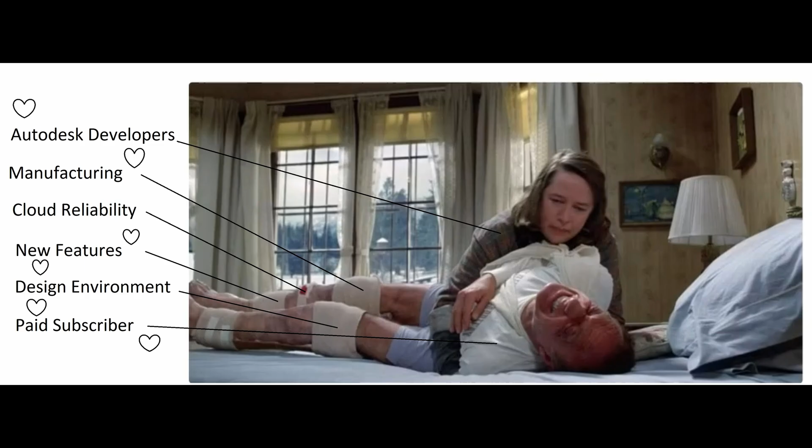Okay, so here we are. It is Saturday at 1:07pm. I was here a little earlier. My internet is connected and I am getting a working offline thing. Earlier I had a working offline.

There's a system problem with Fusion, and so the question is, can I update the files I was working on at the shop? Obviously that is not going to happen.

So I had this graphic here, and it will automatically go into... I tried to flip it back, thinking maybe my internet connection, I had just turned everything on, so I have paused the updates. At least that's one thing Fusion has fixed, because normally when they dumped an update, the system would start getting weird and unstable, the CPU would be working overtime, everything would get hot, and it would get unhappy until it crashed.

So now, fortunately, it can manage offline, which seems to be okay. It's an unexpected outage, that's what happened. So that was great. But what I want to get into is this situation here.

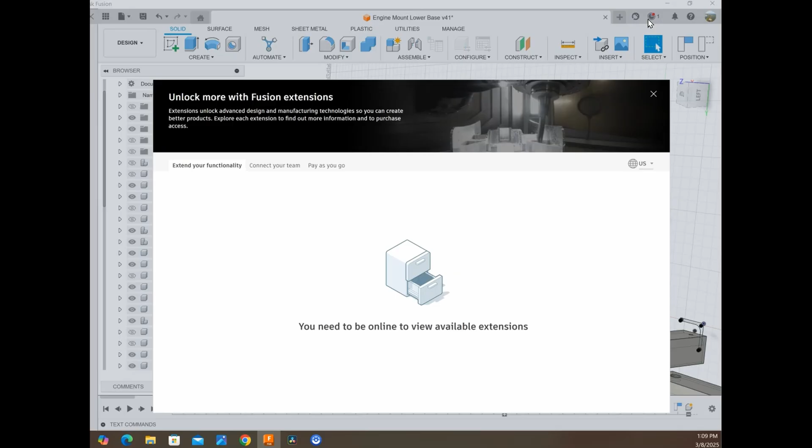When you go and click on the what's new - I think it was a what's new - when you get an update, it'll give you the what's new file. And where was it? It wasn't here. Oh yeah, check out what's new.

So you click this link here, and I don't want to click anywhere near update now, even though - because I don't want it to update - but it'll open a page that I couldn't find on the normal, what do you call it there?

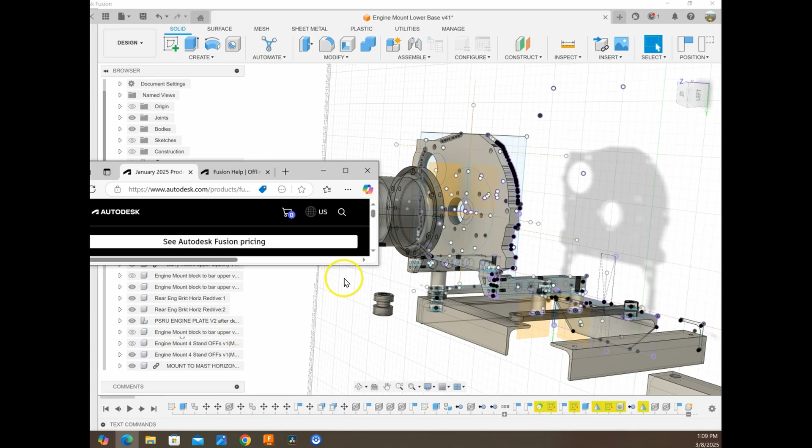So here we go, and everybody's saying that everything is just amazing with Fusion. And because I asked a question, I'm not trying to pull any punches. I love Fusion, the design environment's great, modeling environment's been great. I think it seems to be pretty stable and a mature product.

Everything works the way it should. My gripe is with the CAM environment. But that being said, all the cheerleaders who are running businesses on this, can you please explain to me how you're dealing with all these outages?

And we go to March 5th, right? This is the tale of the tape. This only goes back so far. But you've got stability when saving files - I'm guessing files are being lost. That's always joyful when you're working on something all day and it gets stuck in the queue, or God knows what happens. I've had that happen many, many times.

And then you got a rigid groups problem. If you're not working with joints, I guess you wouldn't notice that, but eventually you do, and that's a problem.

Here, February 23rd, crash scenarios. Update that was preventing keyboard input after the January update. I mean, just at what point?

Okay, great, February 18th, fixed a variety of crashes in the design environment. Well, wonderful. I'm guessing the guys who are running businesses don't have a problem with crashes in the design environment. Their workflows are cool, they're magic, they're absolutely magic. I don't know what operating system they're running - Mac, maybe? Maybe this is not affecting Mac machines.

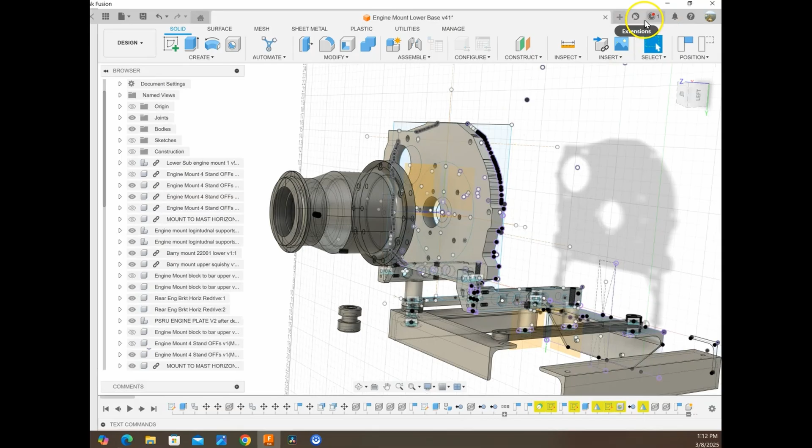January 30th, manufacturing, usability, various crash issues. So this goes only back to January 27th, and we are down here at March 8th. So, and I'm going to work today, trying to get caught up on a Saturday to do some stuff here with my designs, and Fusion is in fuck you mode.

So guys, tell me how you do it. And if I got to learn SolidWorks or I got to learn another software package and pay some money, then so be it. But as a business model, I'm not talking hobby, I'm not messing around to build a birdhouse for your kid or something, where you actually want to do stuff.

So now I'm nervous because anything I do here is not going to be synced to the cloud. And then when I go to my CNC machines, my Lenovo Business ThinkPad at work will not have those files. And so that says, well, then I better put all this on a USB drive. It's just ridiculous. But let's see if this thing will go online.

Oh, now it says working online. Excellent. Only the morning and however long it was offline. And of course, I know there's probably a page with Fusion Health and whatnot.

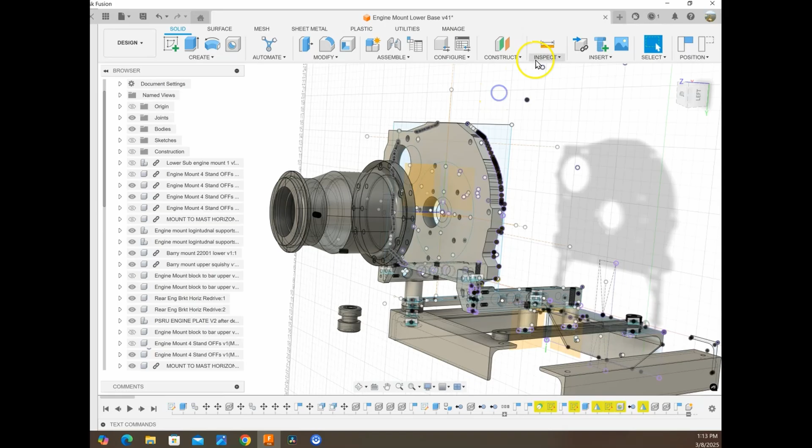My bigger problem was with the libraries, and the libraries were not working the way they should have. So if I went to the manufacturing, let's see if this works, because I was working on cam data at the shop.

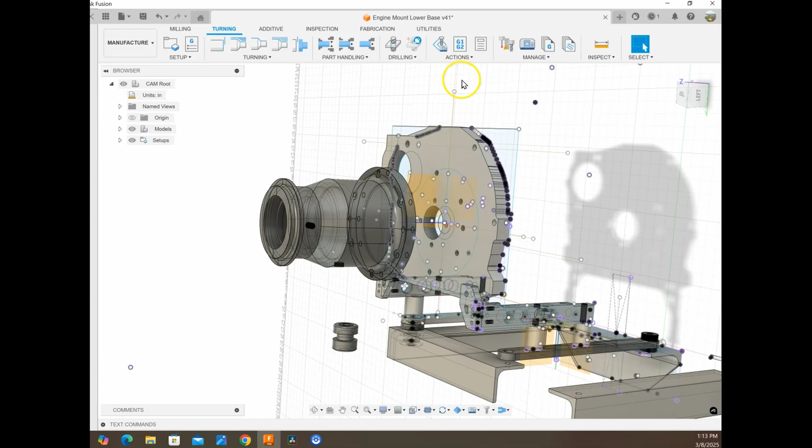And it looks like maybe it's updating. But here we go to the tool library. And let's see, this is gonna...

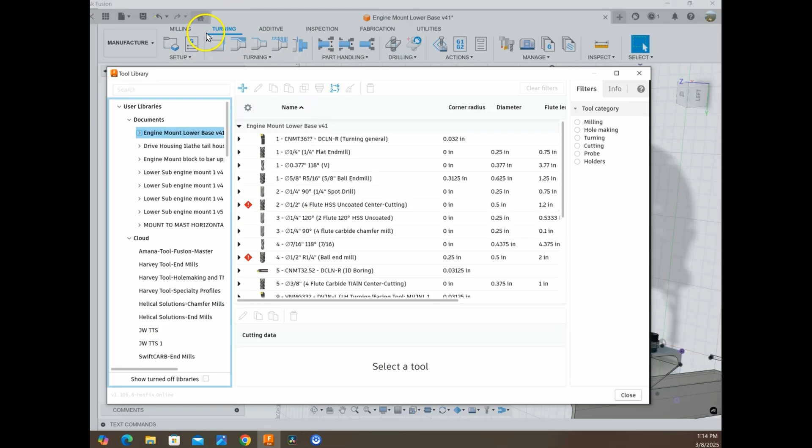Okay, so what we have now here is flags. I don't know if this is a new thing, but I think a lot of the problems with the posting of operations, whether in the turning or the milling or whatever, if it doesn't like the tool, the post will crash. So let's see what we got here.

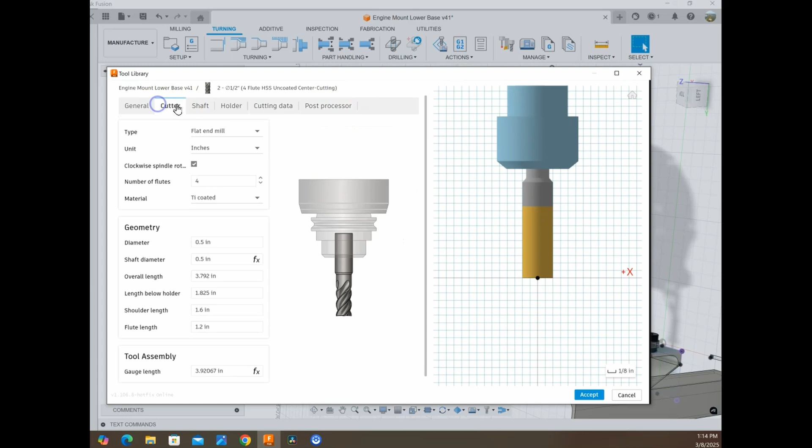It doesn't like something. It was saying before how it didn't like either the cutter or the holder or something, and it would actually give you a warning. It will tell you like the shoulder length can't be more than the overall length or something like that. And so I was like, oh, cool.

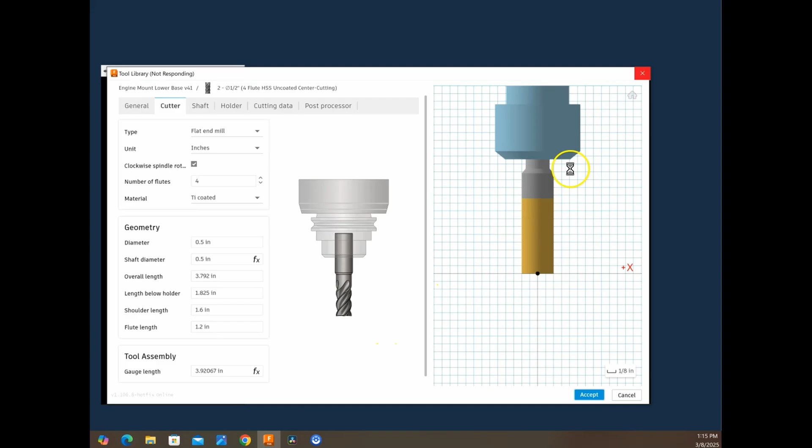You know, when you're working late and you fat finger something, or you put a decimal point in the wrong spot, it's good. And that, according to my programmer friends, tell me that. And here we go, what do we got? See, it doesn't want to crash it, and now we're crashing.

Isn't this joyful? See, this is the kind of shit that's been going on. And you ask, how am I supposed to? Now I'm going to guess it doesn't like the shoulder here. I'm going to guess, I don't know. And now it's not responding, and this is crashing.

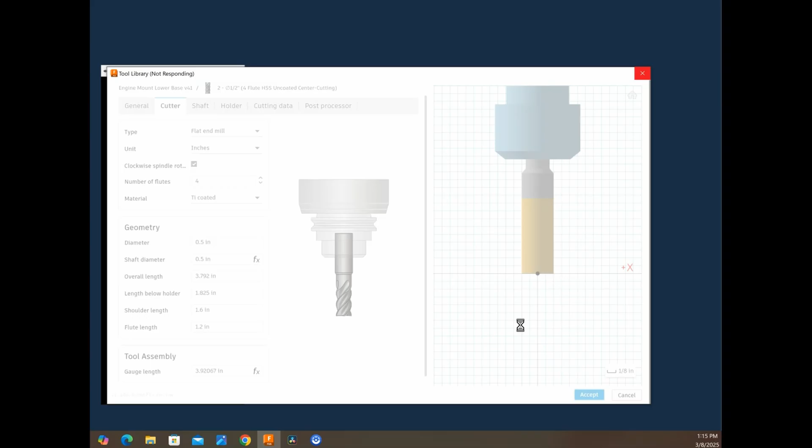So I'll just say this: I think Fusion has a long way to go. They are constantly rolling out new stuff, and I appreciate all the hard work they do. But if I'm paying for a software suite package and it doesn't do what I pay for it to do, and there's more downtime or more issues where I have to do workarounds, then I honestly don't know what's going on here. I mean, this is great.

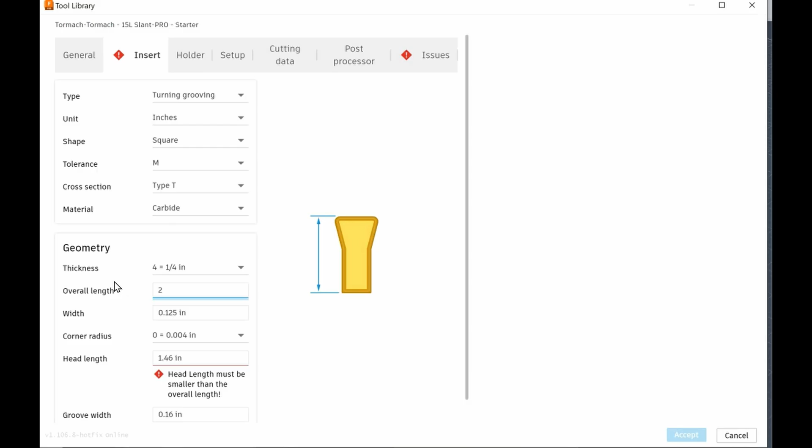This is just great. So I guess we'll close the program. And, you know, perfect. Just perfect, guys. Again, what software package are you using and why? And how are you guys who are actually using this in your business environment running a business if this is how reliable Fusion is? Question mark.